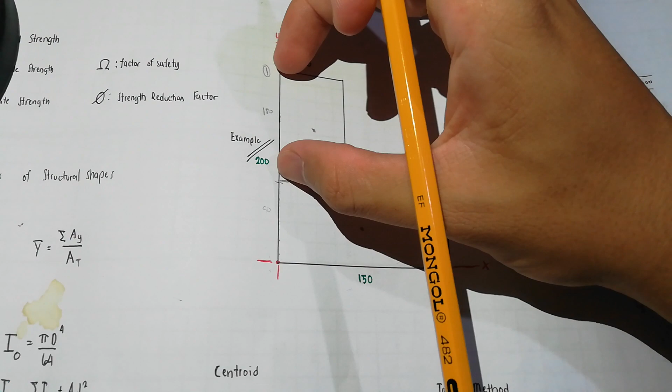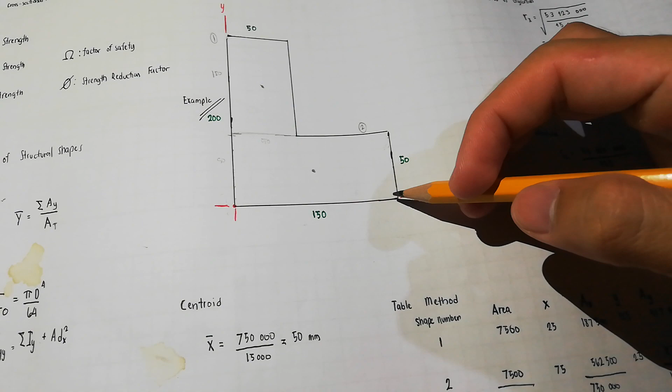So, ito yung ating shape 1, shape 2. Area nito, 150, base times height, base mo is 50, height mo is 150. So, 50 times 150, yan ay 7,500. Ito naman, ang base mo is 150, height mo is 50. So, ang ating area dito sa 2 is also 7,500.

Take note, hinahanap rin natin yung ating total area. Kaya dito, tig-sum up natin siya. 7,500 plus 7,500, 15,000. Then, para sa centroid along the x-axis,

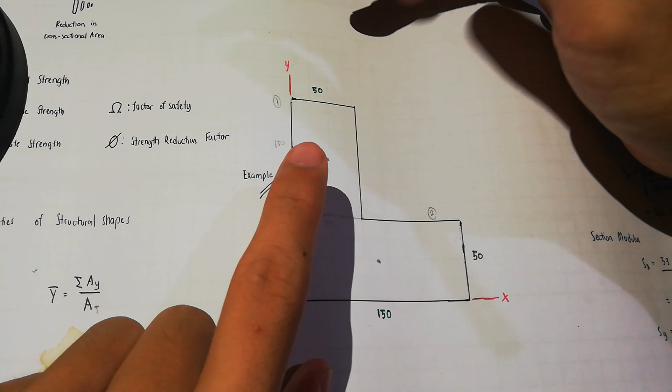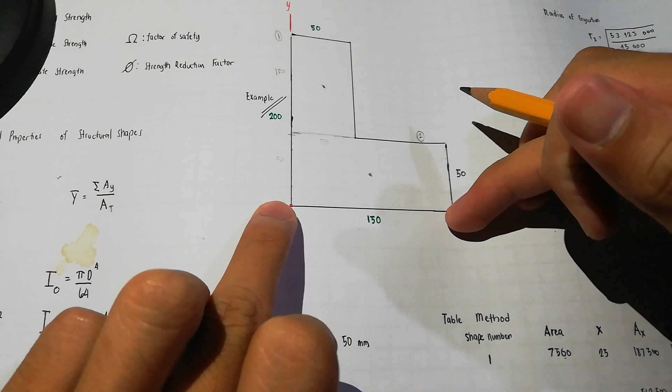Pag rectangle, yung ating length or width is ating dinidivide lang by 2. So, if ating base is 50 divided by 2, ibig sabihin, from this part up to this part, 25 yan. And from this part up to this part, siya ay also 25. Kaya siya 25 dito. Meanwhile, eto, ang kanyang base is 150. So, hatiin mo lang by 2, 75. From this point to this point, yan ay 75. And from this point to this point, yan ay also 75. 75 equals 150.

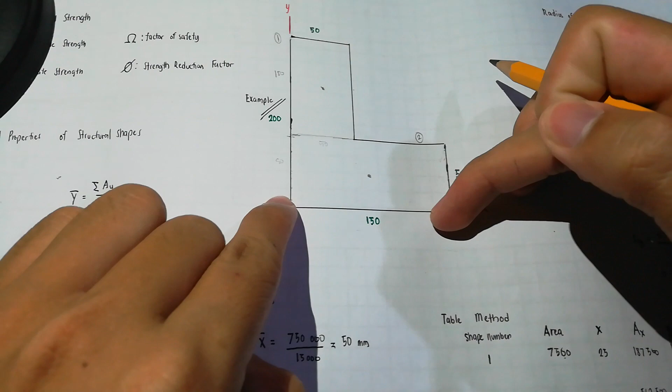Then, for y naman tayo, so, di ba, from this point to this point, yan ay 50. Take note lang natin yan, kasi lahat ng values natin ay with respect sa ating axis. Kunwari, yung sa x natin na centroid, di ba nag-base tayo sa y? From y-axis, para makapunta ka dito, nag-move ka ng 25, di ba? Para makapunta ka dito, 25 yan. Kasi 25 plus 25, 50. Same dito, from y-axis, nag-move tayo ng 75.

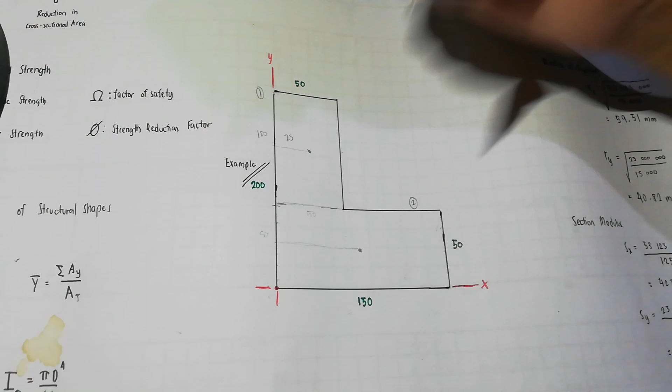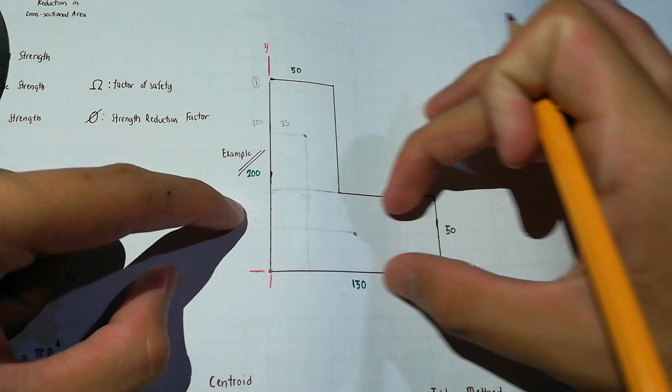Ngayon naman, para sa y na centroid ng individual shape, ano ang distance from x-axis papunta dito? Consider mo muna yung shape. Anong kalahati ng 150? Ito ay 75, di ba? Ngayon, with respect sa ating x-axis, ano yung kanyang distance? So, if this is 75, and this is 50, di ba 50 yan? 50 plus 75, yan ay 125.

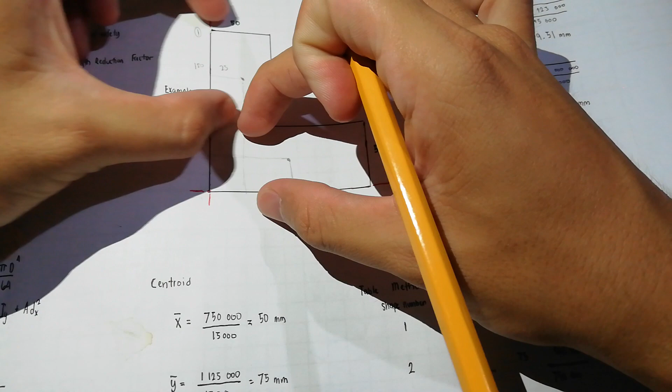At ito naman nasa shape 2, from the x-axis, ano ang distance na to? If ito is 50, hatiin mo lang, 25 na yan. Again, for dito, 50 plus kung anong kalahati na itong shape. 50 plus 75, 125. Then, eto na lang siya.

Area times x, area times y, eto. Then, total area, summation nito, and summation nito, eto. Then, substitute na lang natin dito. Di ba? Summation of ax divided by area total, summation of ay divided by area total, eto. So, eto na yung centroid natin.

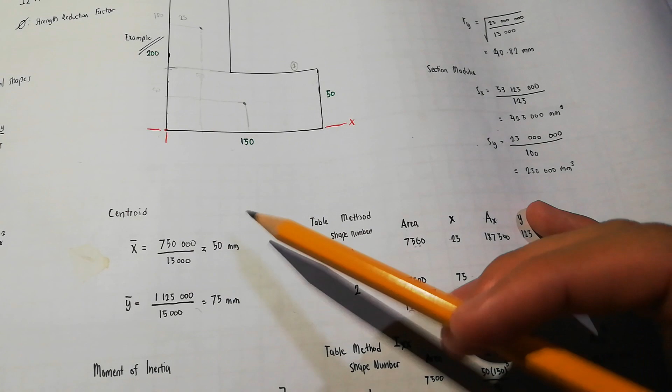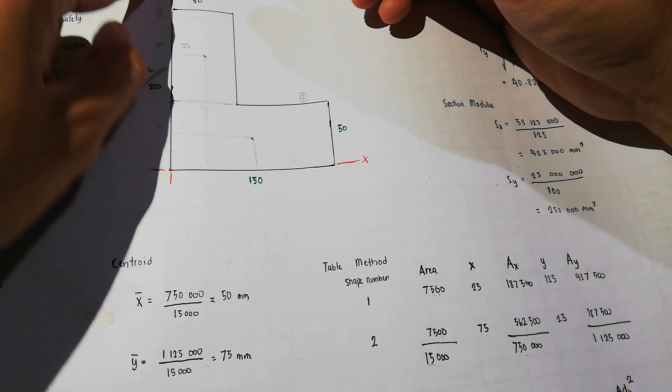Ibig sabihin, di ba, x bar to. So, from the x-axis, x bar, so from the y-axis, ang kanyang location ay 50 millimeters. So, ibig sabihin, okay, from the y-axis, siya ay 50 millimeters ang distance. So, anywhere siya dito. Kahit saan, pwede kang dito mag-drawing, dito. Basta ang point natin, siya ay 50 millimeters from the y-axis.

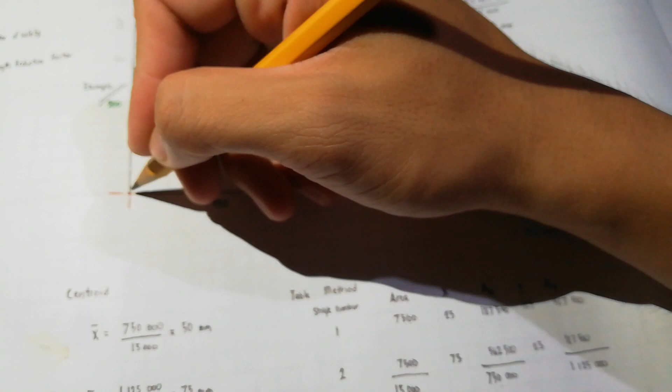Bakit ko ba sinabi na pwede siyang dito? Kasi hindi ko pa plot yung kanyang y-bar. So, ang sabi, ang kanyang y-bar is 75 mm from the x-axis. So, from the x-axis, siya ay 75 mm pataas. So, to be specific, kapag kinumbine natin yung dalawang coordinates, siya ay 50 mm from the y-axis and siya ay 75 mm from the x-axis. So, dito tayo intersect.

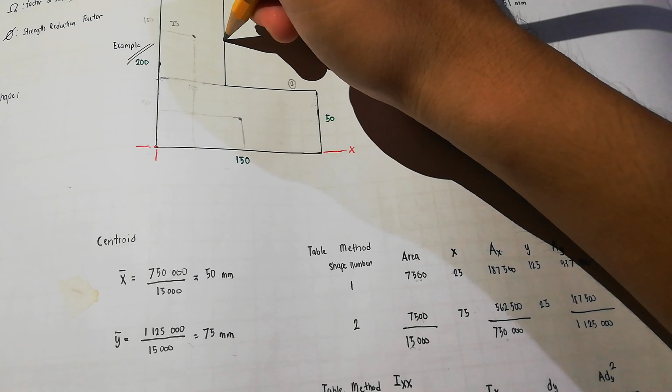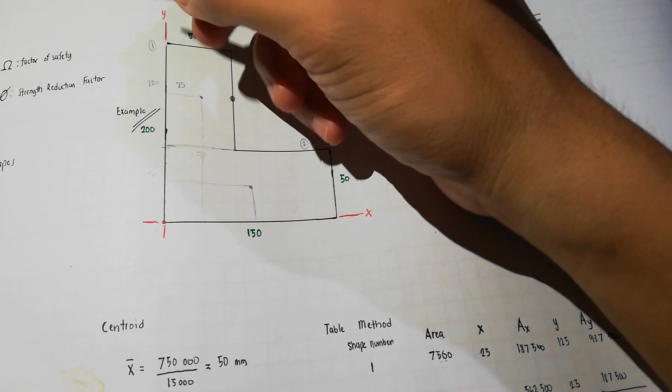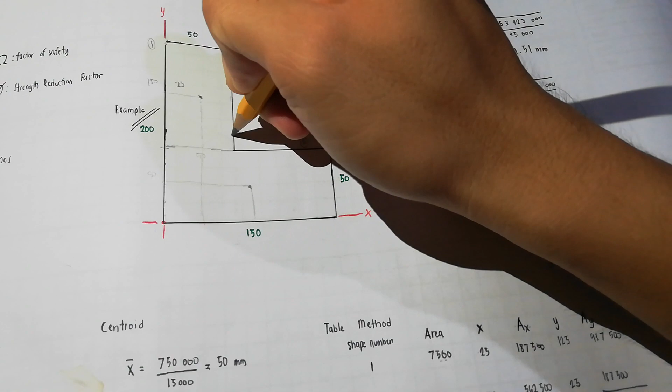Kapag dinibrat natin etong point na to, from the y-axis, siya ay 50. Diba 50 to? Siya ay 50. And from the x-axis, siya ay 75. 50 plus... wait lang. Mali. 75 na pala to, 50 plus 25. So, mga dito, 75, estimate lang yan. So, ito yung ating centroid.

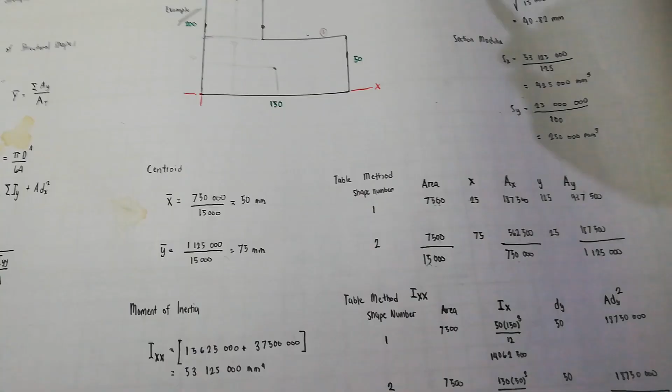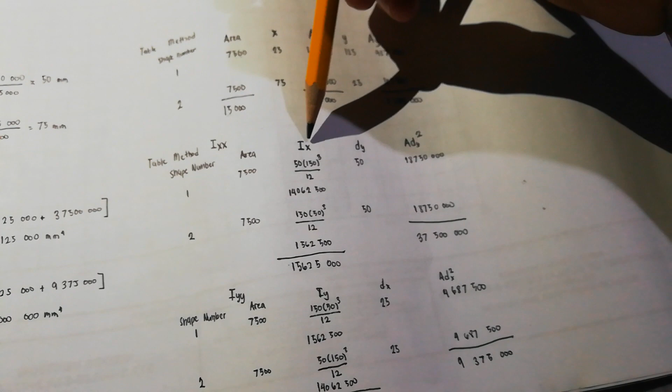Then, for the moment of inertia, ito yung ating formula: Ix plus AD square y, or Iy plus AD square x. So, table lang ang gagamitin natin, one table for the Ixx and another table for the Iyy. So, ito yung components natin: area, Ix, dy, and yung product ng area and dy.

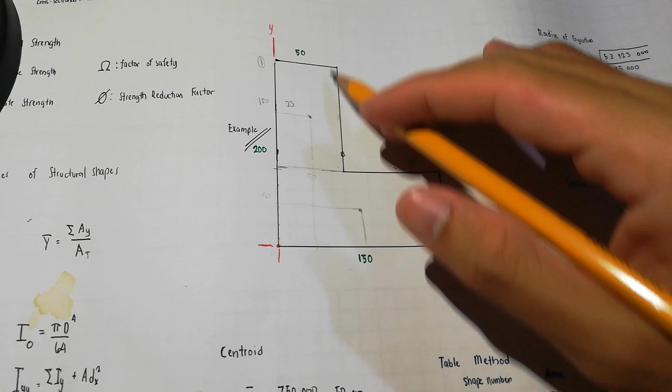So, area, copy lang natin, 7500. Ix, ang ating formula with respect sa x-axis is base times height cube over 12. Dito, ang kanyang base is 50, ang kanyang height is 150, kaya siya 50 times 150 cube. Dito, ang kanyang base is 150, ang kanyang height is 50, kaya siya 150 by 50 cube. Sa first shape, ang kanyang base is 50, kaya 150 yung naka-cube kasi ito yung height niya. Dito naman, 150 yung base, 50 yung height niya, kaya ito yung naka-cube.

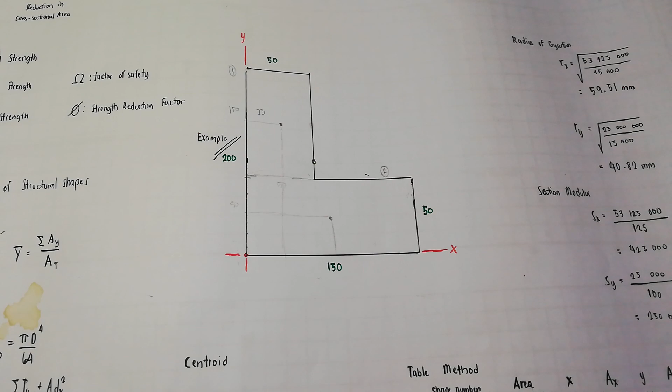Then, ang dy, ito yung distance y from the neutral axis. Ano ba yung neutral axis natin? So, ang ating neutral axis, siya yung axis na dumadaan doon sa ating pinaka-centroid ng shape. So, ito yung main centroid ng shape, ito ang kanyang neutral axis. Dumadaan siya dito.

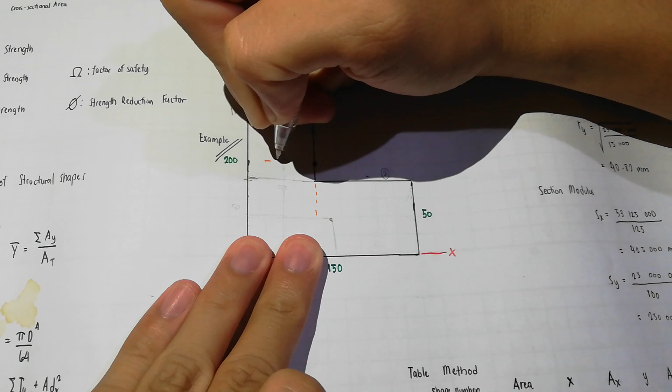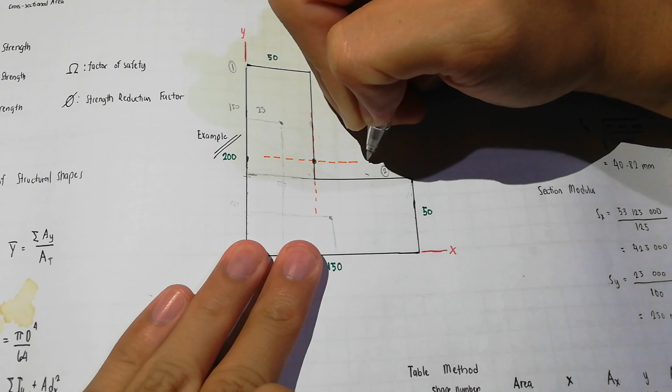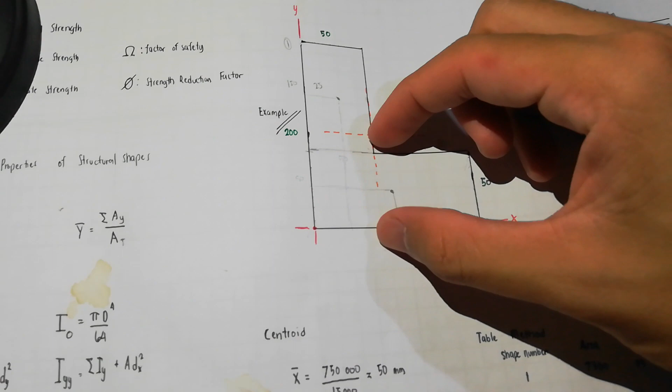So ang sabi dito, siya ay dy - ibig sabihin siya ay distance along the y part. So di ba ito is 75 based sa ating nakuhang centroid? 75. And etong centroid nung sa shape 1, yan ay 125, di ba? So ibig sabihin, ano daw yung distance in between na to? Anong kanyang distansya? Gaano sila kalayo in terms of y direction?

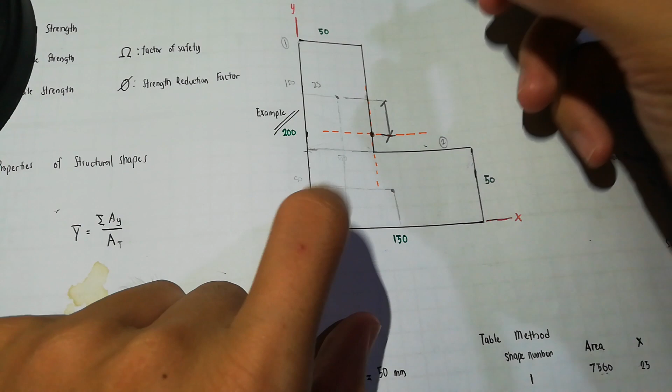Again, eto is 125, eto is 75. So ibig sabihin, 125 minus 75, eto na lang matitira, di ba? Bawasan mo ng ganito, eto yung matitira. So 125 minus 75, yan ay 50. Kaya ang nandito is 50.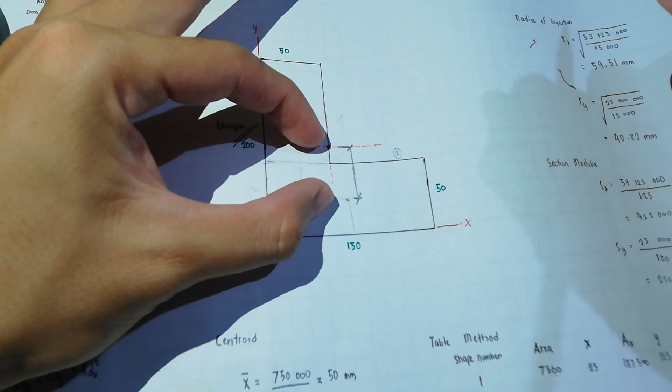So same idea para dito sa baba. Ito yung ating hinanap distance. Gaano kalayo ito? So if ito ay 75 and ito is 25, di ba? Pag binawas mo to dito, ito matitira. So 50 minus 25, 75 minus 25, that is 50. Kaya siya 50. So after that,

Area times dy square. Square natin to, times area, ito yung kinagabasan. Square natin to, times area, ito kinagabasan, which is just the same.

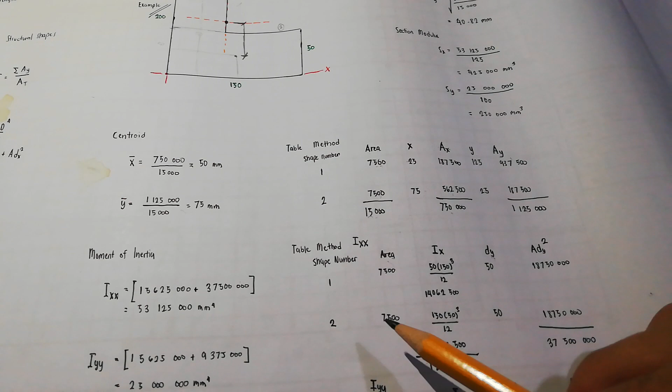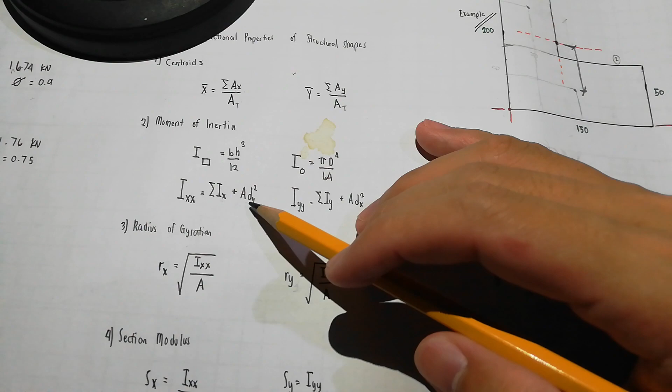So sabi rin sa formula ng IXX, ito ay summation ng IX and ng ADY square. So yung IX natin, inad natin, itong dalawa, ito na siya. And yung ating ADY square, inad natin, ito na siya. So ibig sabihin, ito na lang yung ating isa-substitute dito sa formula. For IX, ito na siya. For ADY square, ito na siya. So ito na yung ating IXX.

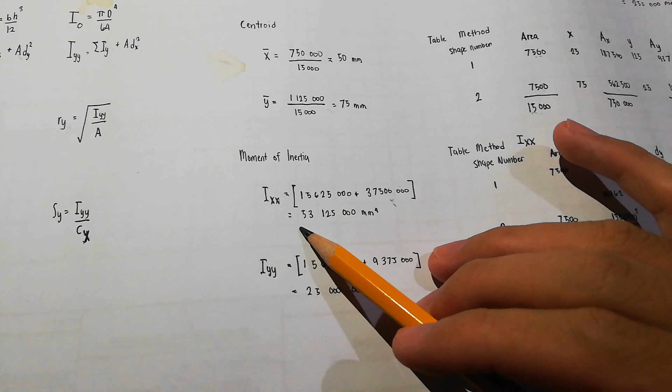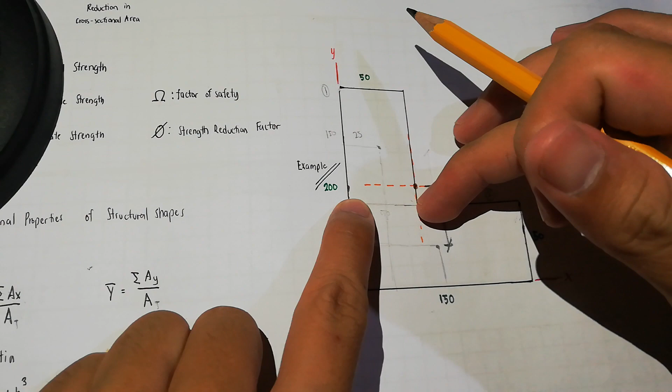So same idea pagdating sa IYY. Area, okay na yan, ADX square. So ibig sabihin, ang ating reference naman is y-axis. So magbabago din yung orientation. Kung sa x-axis, ito yung ating base, ito yung height. Pagdating sa y-axis, mag-flip yan. Ito na yung base mo, yung y-axis na ang base mo, x-axis na ang height mo.

Ibig sabihin, para sa shape 1, ang base mo is 150, ang height mo is 50. Kaya siya naging 150 times 50 cube. Kasi ang base mo is 150, height mo is 50. Pagdating naman dito, ito naman ang base mo, ito naman ang height mo. Base mo is 50, height mo is 150. Kaya siya 50, 150 square, 150 cube over 12.

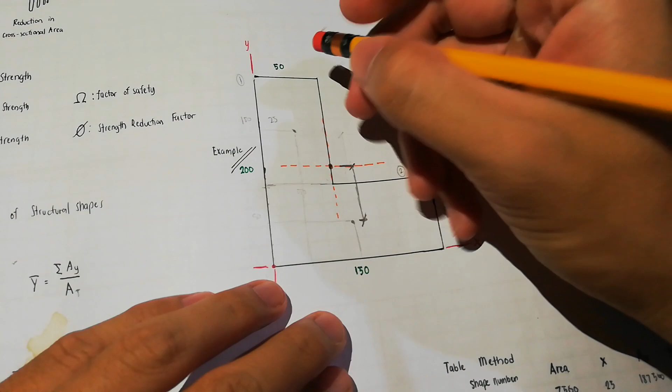Then for dx naman, kung sa IXX, distance tayo sa y part. Sa IYY, distance naman tayo sa x part. Ibig sabihin, gaano kalayo etong centroid na to, sa centroid na to. Take note, eto yung centroid ng buong figure, eto yung centroid ng shape 1.

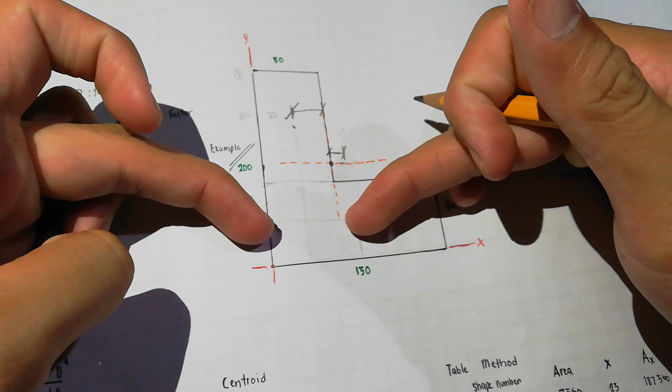Gaano kalayo. So if eto is 50, di ba 50 yan? And eto daw is 25. 50 minus 25 is 25. Ngayon, for this part naman, gaano kalayo eto dito? So hindi accurate yung ating figure. If eto is 75 and eto is 50, 75 minus 50 gives us 25.

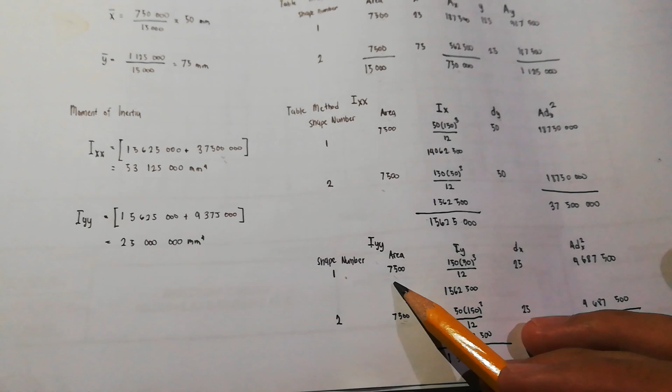Kaya siya 25. So the same idea, area times dx square, area times dx square, summation ng IY, summation nito, saipak mo lang sa equation natin, which is IY, summation ng IY, plus summation ng ADX square. So ito na siya.

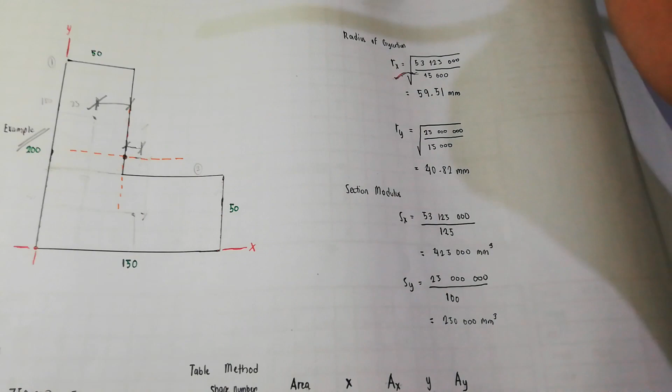Then next, kasunod natin is radius of gyration, which is just yung ating IXX divided by area total. And yung sagot sa quotient nito, square root natin. So yan. Ito naman, IYY divided by area total, square root natin, ito na yung sagot.

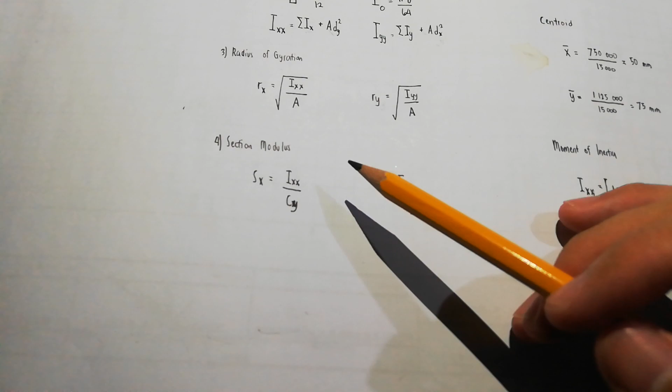Then sa last part is section modulus. Section modulus is just the quotient of Ixx divided by yung Cy natin. Ano ba yung Cy natin? Cy natin is the maximum distance along the y direction papunta sa ating neutral axis. So paano ba yon? So eto yung ating neutral axis, di ba?

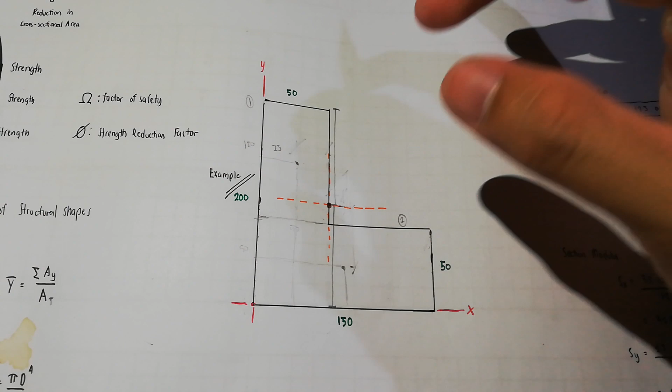Sabi natin sa Ixx, siya ay y distance. So from the neutral axis, meron tayong dalawang distance. From this point, papunta sa baba, and this point, papunta sa taas. Yan yung ating two choices. Ang tanong natin, ano yung mas malaki sa dalawa? Di ba, eto is 75. Sabi natin, 75 yan. So ano tong remaining distance?

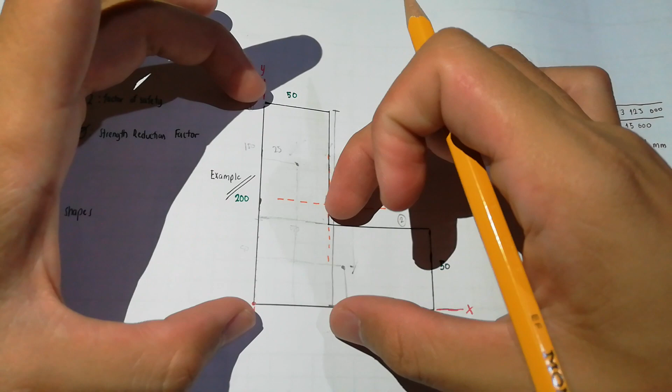Di ba, eto is 200, ang total haba niya, and this is 75. So 200 minus 75 gives us 125. Kasi 125 plus 75, 200 yan. So ibig sabihin, between 75 and 125, mas malaki yung 125. So yun yung ating gagamitin dito, 125.

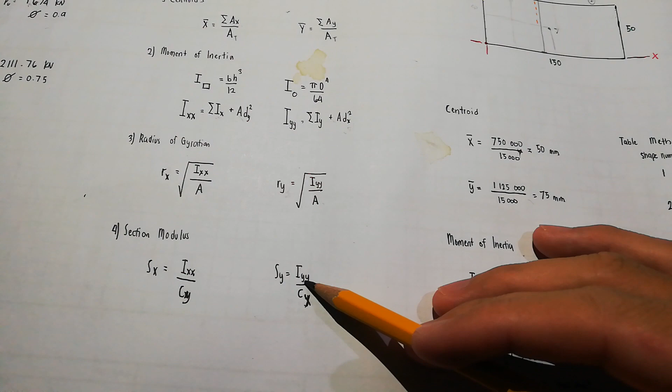Then, para naman sa section modulus y, yan ay Iyy divided by Cx. So Cx. From this point to this point, di ba ito ay 50? Take note, 150 yung buong base natin. So from this point up to the rightmost point, if ito is 50, then definitely ito is 100 para maging 150 siya. So between 50 and 100, mas malaki yung 100.

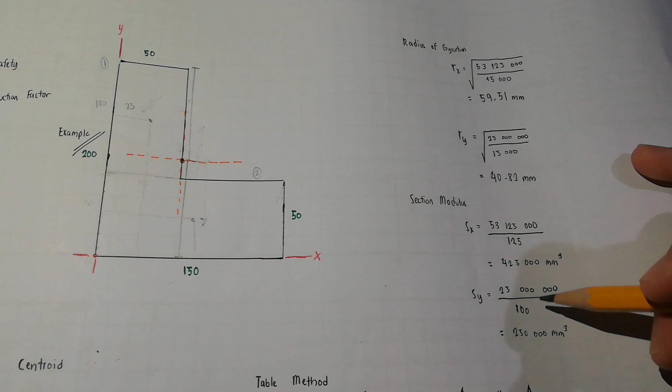Kaya, ang gagamitin natin dito is 100. Divide lang natin. Ito na yung ating section modulus.